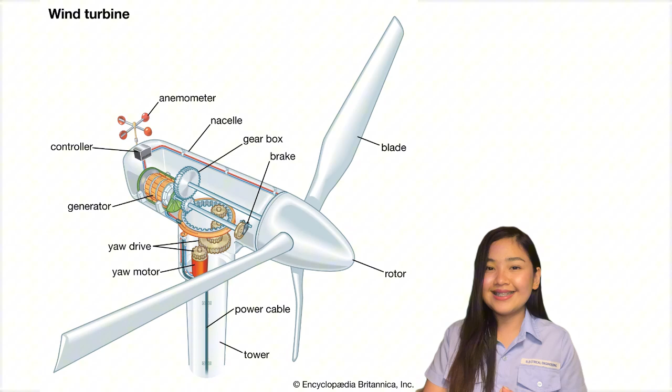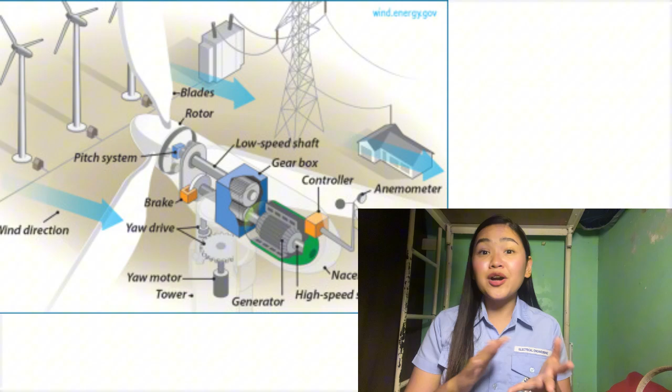To summarize this slide, provided with the full visual presentation of the wind turbine, nakikita natin kung paano nagtutulungan ang lahat ng parts na napag-usapan natin, from the blades to the generator, para makagawa ng kuryente sa sustainable na paraan. Wind turbines are the perfect example of how engineering and nature can work hand in hand to create solutions for renewable energy.

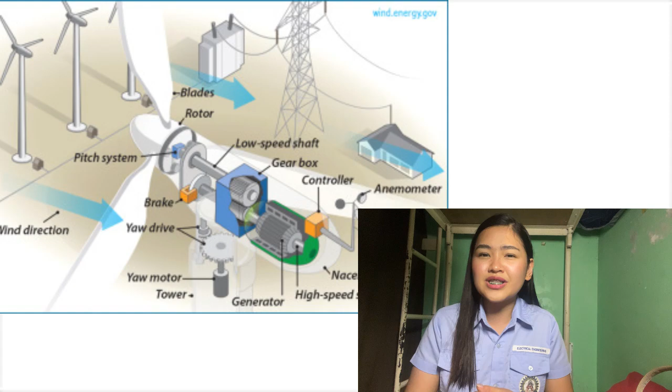Let's dive deeper into the key parts of the wind turbine and their specific functions. The first one, blades. This captures the wind energy and rotates due to the wind force.

The second one, low-speed shaft. Ito naman ang nagtatransfer ng motion mula blades papuntang gearbox. Gearbox, pinapabilis dito ang rotation speed upang magamit ang generator. At pang-apat, generator. Ito ang nagko-convert ng mechanical energy to electrical energy.

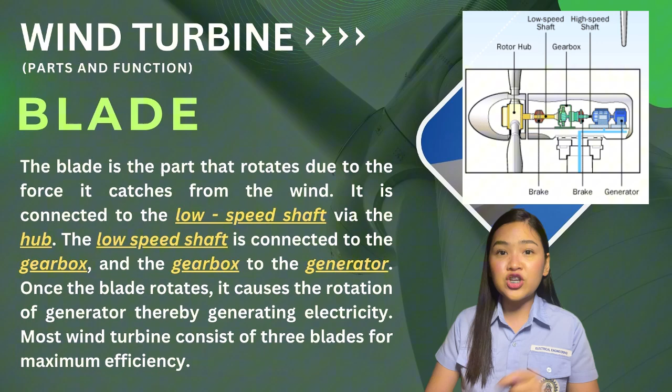Most modern turbines have 3 blades. Bakit nga ba 3? This design provides balance between efficiency and mechanical stability. Example, think of it like a bicycle. The gears and chain help transfer pedaling effort efficiently, allowing the wheels to spin faster with less effort, just like a gearbox in the wind turbine.

Now, let's move on to different parts of design ng wind turbines. Modern turbines are designed with long and wide blades, typically ranging from 40 to 60 meters in length. Ang haba at laki ng blades ay napakahalaga para mas masalo niya ang mas maraming air or hangin.

As technology has advanced, wind turbines have become quieter, more efficient, and more compact. Sa ngayon, mas adaptable na ito sa iba't ibang environment, mula rural areas hanggang sa coastal regions. Example nito, kung nakita nyo yung wind turbines sa Ilocos Norte, sobrang laki at taas nila, di ba? Pero kahit ganoon kalaki, napaka-silent operator nila. Hindi mo halos maririnig ang tunog kahit nasa malapit ka.

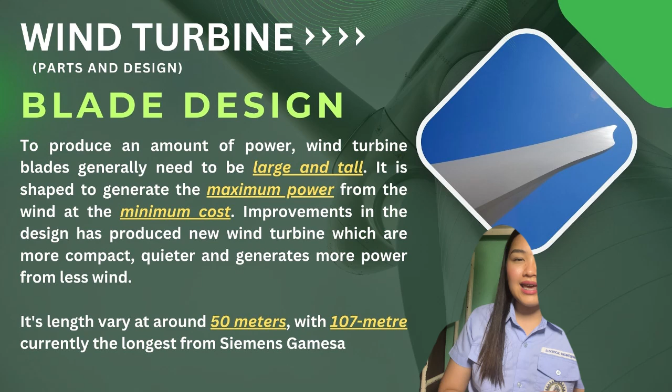Ngayon, pag-usapan naman natin ang mismong design ng blade. The shape of the blade's cross-section is crucial for its aerodynamic performance. Kapag tinamaan ng hangin ang blade, it creates a lifting force, causing the blade to rotate. Sa dulo ng blade or tip, umiikot ito ng mas mabilis kaysa sa bilis ng hangin mismo. Ang phenomenon na ito ang dahilan kung bakit sobrang efficient ang wind turbines sa pag-capture ng energy.

Example nito, parang yung kamay mo, kapag inilabas mo ito sa bintana ng kotse, kapag itinilt mo ito, nararamdaman mo na parang tinutulak ng hangin pataas o pababa yung kamay mo, di ba? Ganyan ang principle na ginagamit sa blade para umikot at ma-maximize ang hangin.

The modern blade designs are also optimized to perform well in different wind speeds, whether it's a gentle breeze or strong gust. This versatility makes wind turbines a more reliable energy source.

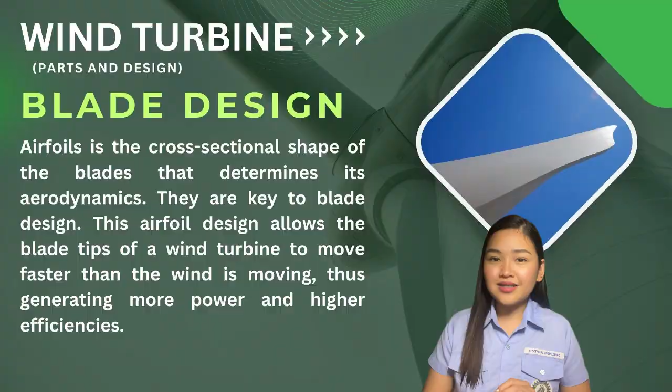For our next slide, the airfoil design. Para mas maging effective ang wind turbine, sobrang mahalaga ang design ng blades. Dito pumapasok ang konsepto ng airfoils. Ito ay isang cross-sectional shape ng blades. Ang airfoils ay shape kung saan dinedesign depende sa laki ng blade.

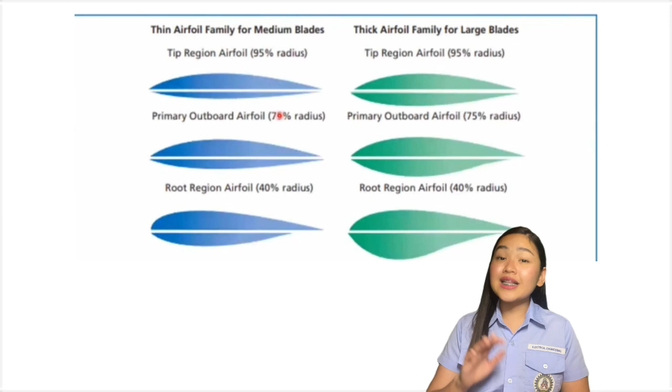Each blade has a specific role. The first is the tip region, 95% of the radius. This is the end of the blade which is designed for speed.

The second is the primary outboard airfoils, around 75%, where the captured energy is concentrated.

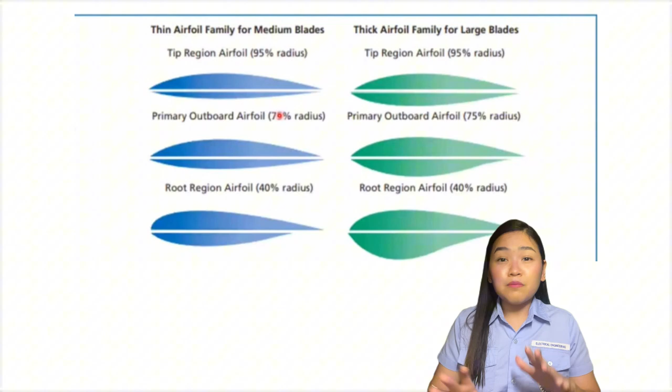Think of the blade design like an airplane wing. It's not flat but curved to maximize the lift created by the wind. This ensures that the wind turbine can convert even weak winds into usable energy efficiently.

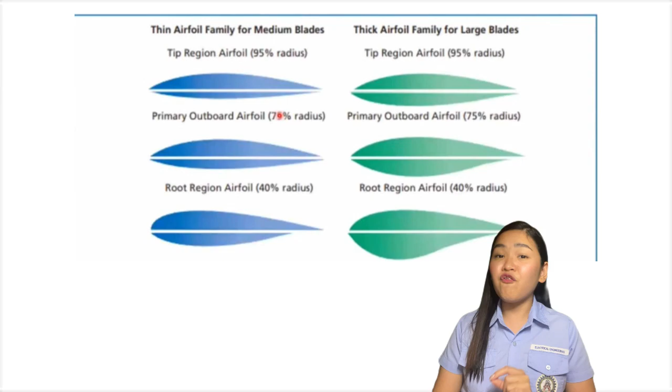Another part and design aspect of the wind turbine is blade aerodynamics. Wind turbine blades work by generating two aerodynamic forces, the lift force and the drag force, due to the wind and the airfoils.

Lift force is perpendicular to the airflow and is in line with the blade rotation, while drag force is in line with the apparent wind direction, which opposes the blade's motion. Drag increases in proportion to the frontal area of the object facing the wind.

Additional information about lift: the curved side of the blade creates low pressure while the flat side creates high pressure. The pressure difference pushes the blade away from the wind. The lift force increases as the blade is turned at a greater angle of attack.

At a very large angle of attack, the blade stalls and the lift decreases.

Additional information for the drag force: drag force is the friction of the wind against the blade surface. That friction is what creates the drag.

Next, the turbulence at the trailing edge of the blade also creates drag, and design engineers try to minimize drag to make the turbine more effective.

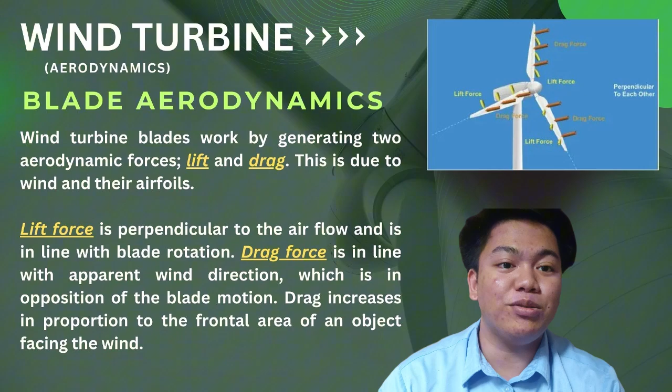In this presentation, we will see two formulas: the formula for lift force and for drag force. First, to calculate the lift force, we multiply CL, which is the coefficient of lift force.

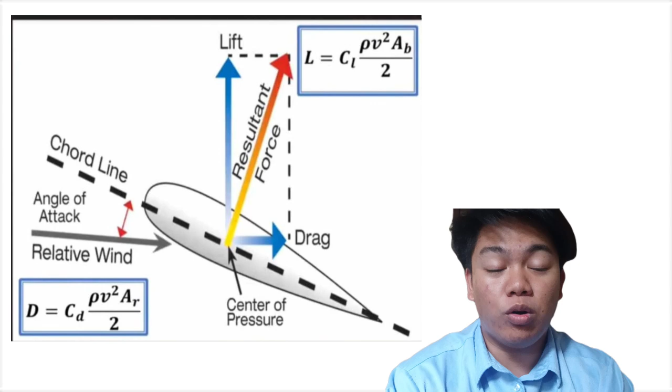Continuing with blade aerodynamics: another thing the airfoils enable is for the blade to attain a difference in pressure on both sides.

The most curved side, or convex side, generates low air pressure, while high pressure air pushes on the less curved, slightly concave side. This is actually the reason for blade rotation.

Another explanation for how the blade rotates is that air wants to move from the high pressure area to the low pressure area, causing the blade to spin.

Another key point for this is Bernoulli's principle, which explains how a pressure difference can create lift. When a fluid, like air, flows over a curved surface, it has to travel a longer distance on the curved side, causing it to speed up and thus creating a low pressure area.

Also responsible for this are the blade design and the rotation direction.

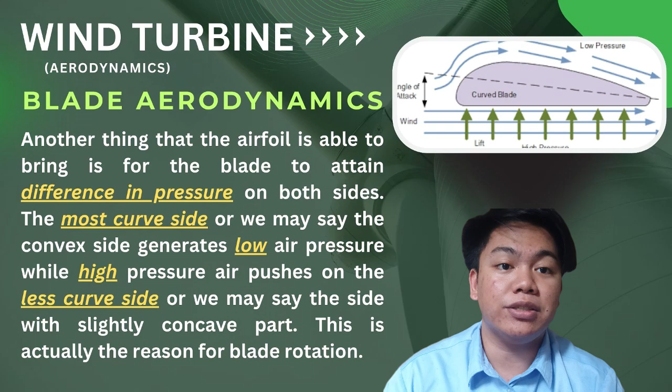The next part is the blade wind orientation. Here is the question: based on the figure illustrating the optimum angle of attack, which part of the blade is the leading edge and the trailing edge, front and back? To further elaborate, this is the explanation for you.

In a wind turbine, the angle of attack is crucial because it directly determines the amount of lift force generated by the blades, which is primary for converting wind energy into rotational power. Essentially, the optimal angle of attack maximizes the lift force while minimizing drag, allowing turbines to extract the most energy from the wind. The key points about the angle of attack is, well, first, the lift force.

The angle of attack is also important for stall condition. If the angle of attack becomes too large, the airflow over the blades separates, causing a sudden drop in lift known as stall, significantly reducing power output. Another point is blade design: wind turbine blades are designed with a specific airfoil shape to optimize angle of attack for efficient power generation across a range of wind speed.

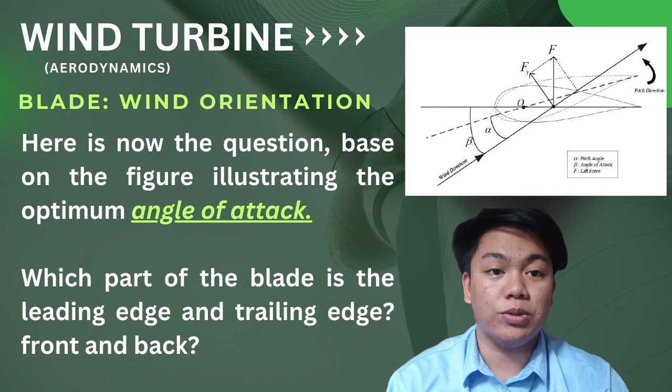Also, angle of attack is important for pitch control. Wind turbines use a pitch control system to adjust the angle of attack of the blade by changing their pitch angle, allowing them to maintain optimal performance in varying wind conditions. And the last one, dynamic changes: the angle of attack constantly changes as the blade rotates and encounters different wind speeds at various points along its span. That's why angle of attack is really important in order for a wind turbine to maximize its power conversion potential.

The next presentation for the blade rotation, we have a question here. What will be the rotation of the blade? Is it pushed to the side that has more curve, or pushed to the side that has less curve?

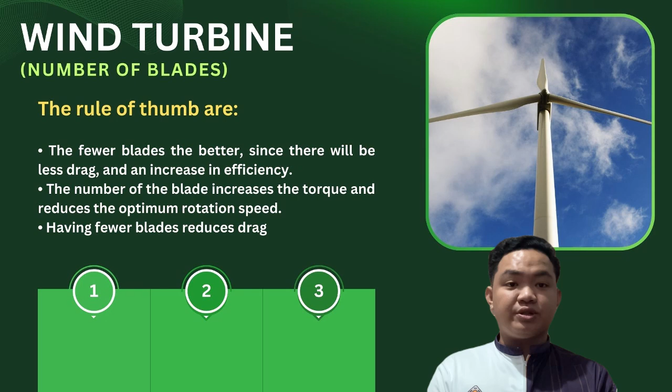Aralin natin maigi bakit 3 blades ang nagbibigay ng best performance.

Dito ay makikita natin ang 1 blade na wind turbine. Obviously, makikita natin na ang mangyayari talaga dito ay hindi magiging balance yung weight ng wind turbine na makakaapekto sa stability ng wind turbine.

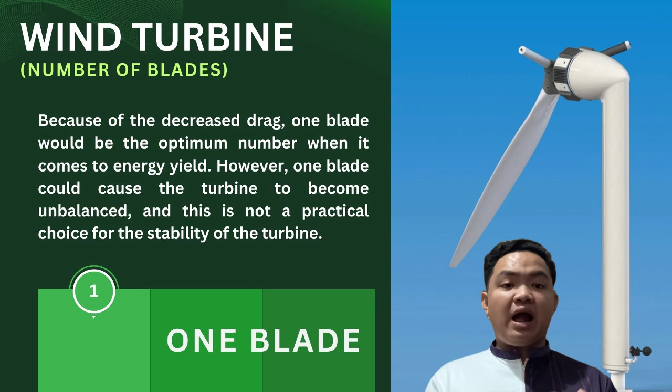O dito naman, makikita natin yung 2 blade na wind turbine. Ayan, makikita naman natin na magiging balance na yung weight, tapos masasabi din natin na mas maliit yung drag force na ma-generate nito. So bakit hindi 2 blades ang best design?

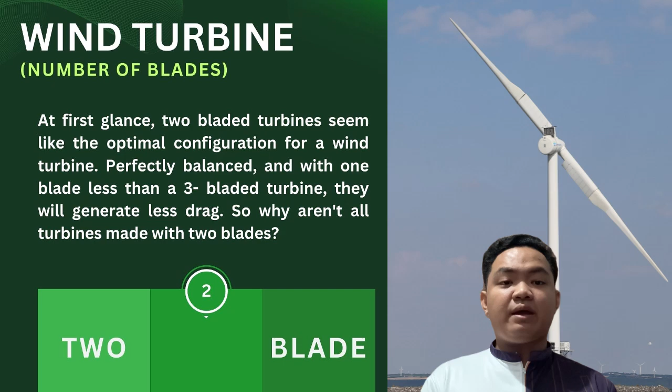Ang dahilan ay makakaapekto ito sa yawing. Ano nga ba yung yawing na tinatawag? Ito ay yung pagsunod ng nacelle sa direksyon ng hangin kasi yung nacelle ay hindi naman nakafix. Ang 2 blades design ay hindi kayang sumuporta ng yawing na mangyayari kapag nabago ang direksyon ng hangin. Kaya kung ito ay gagamitin, ay magkakaroon ito ng wobble na magre-resulta ulit sa unbalance.

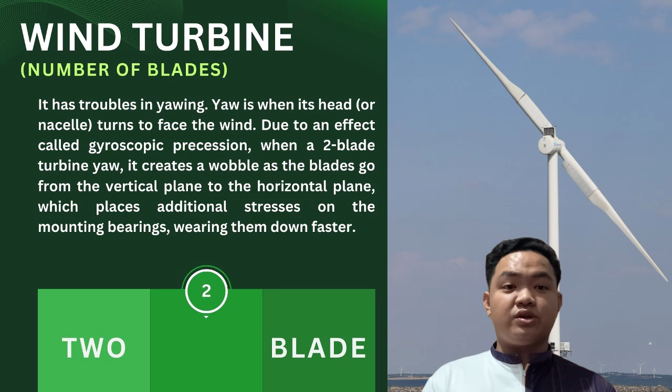Dahil madadagdagan yung stress sa bearings, kaya hindi rin maganda ang 2 blade design para sa wind turbine. Kung more than 3 blades naman, mas malaki yung magiging wind resistance niya at magre-resulta daw ito sa mas mabagal na generation ng kuryente. So paano malaki ang wind resistance?

Ganito yan. Sa physics, napag-aralan natin ang static force. The more na mas mabigat ang object is mas mahirap itong pagalawin o itulak. Ganun na lamang din sa blades ng wind turbine.

The blade tilting mechanism in a wind turbine is a system that adjusts the angle of the blades in response to the changes in wind speed. Kapag tumaas ang bilis ng hangin, nagbabago rin ang anggulo ng relatibong bilis ng hangin. And to maintain optimal efficiency, the blades need to be adjusted always to be at the optimum angle of attack. And this mechanism uses sensors to detect wind speed and then automatically tilts the blades to the most efficient angle.

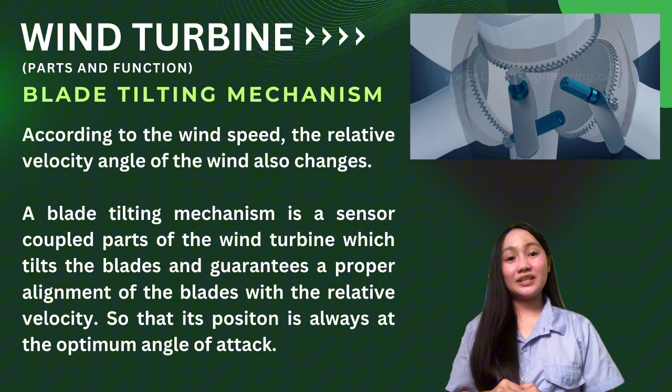Now let's talk about the nacelle. The nacelle is the housing located at the back of the wind turbine blades. Think of it as the brain of the operation. Inside this protective casing are crucial components that convert the rotational energy from the blades into usable electricity. Specifically, naglalaman ito ng gearbox na kung saan nagpapataas ng rotational speed ng low-speed shaft na nanggagaling sa mga blades at ang generator na nagko-convert ng bilis na ito sa kuryente. Other than this, iba pang maliliit na bahagi ay nasa loob din ng nacelle para matiyak ang maayos at efficient operation.

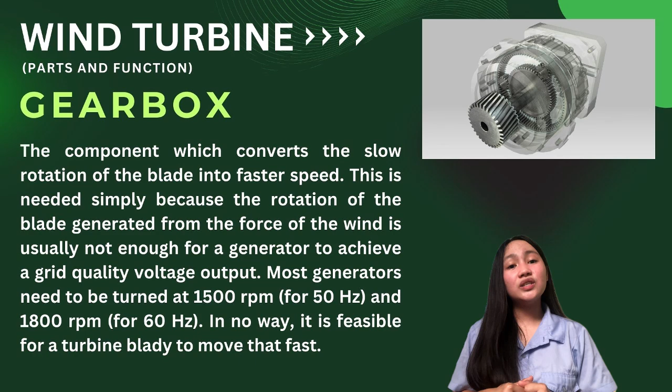Next in line is the gearbox. The gearbox in a wind turbine is a crucial component that increases the rotational speed of the turbine's blades. The slow rotation generated by the wind isn't fast enough to produce grid quality electricity. The gearbox acts as a speed increaser, stepping up the relatively slow rotation of the main shaft to a much faster speed required by the generator. Ang mas mabilis na pag-ikot na ito ay nagpapahintulot sa generator na makagawa ng kinakailangang voltage at frequency para sa electrical grid.

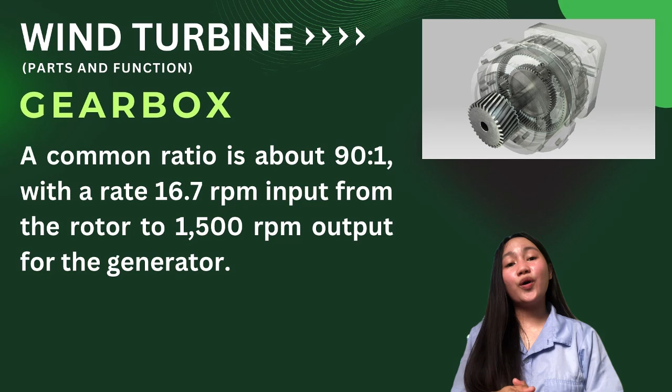The gearbox in a wind turbine uses a system of gears to increase the rotational speed. A common gear ratio is around 90:1. Ibig sabihin, for every rotation of the input shaft, or yung connected sa rotor, the output shaft na connected sa generator rotates 90 times. At ang malaking pagtaas na ito ng bilis ay kinakailangan dahil ang mabagal na pag-ikot ng mga blades na direktang pinapaandar ng hangin ay hindi sapat na mabilis para sa efficient na pagbuo ng kuryente or electricity.

Moving on to direct drive. A direct drive wind turbine is an alternative design that eliminates the gearbox found in traditional wind turbines. In a direct drive system, the main shaft is directly connected to the generator. This means the generator spins at the same speed as the turbine blades. Ang kawalan ng gearbox ay nagpapasimple sa sistema, binabawasan ng bilang ng mga gumagalaw na bahagi at nag-uugnay na pagkasira.

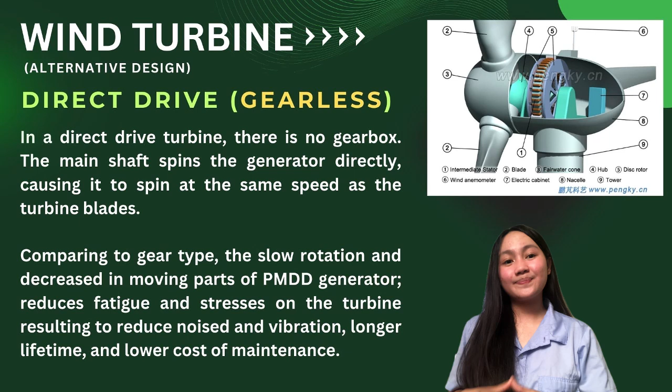As for this slide, the image shows a diagram of a direct drive Hercules wind turbine with its components labeled. And due to inconsistent wind, gear-type turbines often operate at partial loads, while the PMDD or the permanent magnet direct drive generator in a direct drive turbine maintains efficiency even under these conditions. This makes it suitable for offshore wind applications.

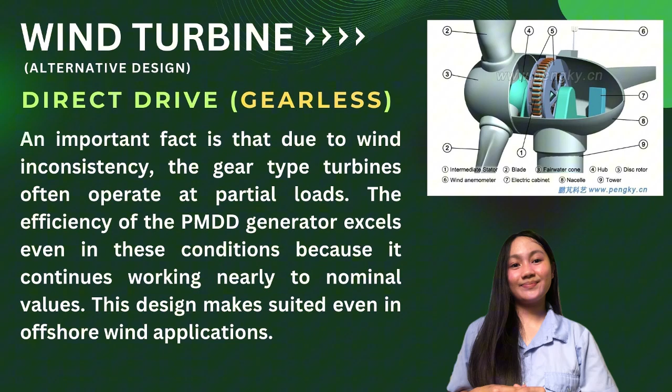The core content highlights the advantage of a direct drive wind turbine design, particularly its superior performance under fluctuating wind conditions and its suitability for offshore use. This slide shows a large generator used in a direct drive wind turbine.

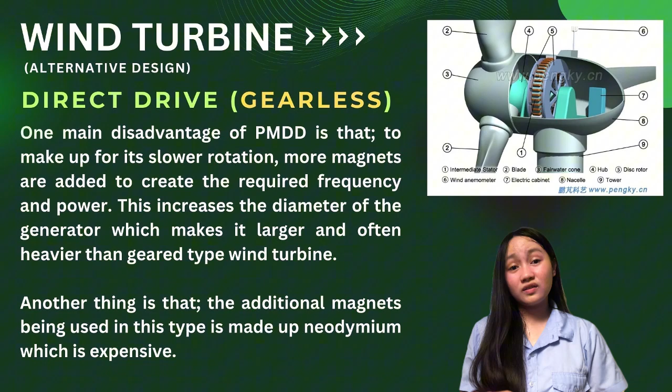It explains that one main disadvantage of this type of generator, the PMDD or permanent magnet direct drive, is its lower rotation speed. To compensate and generate the required power, more magnets are needed, resulting in a larger and heavier generator compared to those used in gear-type wind turbines. Additionally, the magnets used in PMDD generators are often made of neodymium, a costly material. Therefore, while direct drive systems offer efficiency advantages in some areas, the higher manufacturing and maintenance costs are a significant factor to consider.

Wind turbine parts and functions: the brake. The brake system in a wind turbine is a protective device coupled with sensors which automatically stops the rotation of the blades whenever it detects activities that could harm the system during operation, for example very high wind speed, vital parts not working, or maintenance on power lines.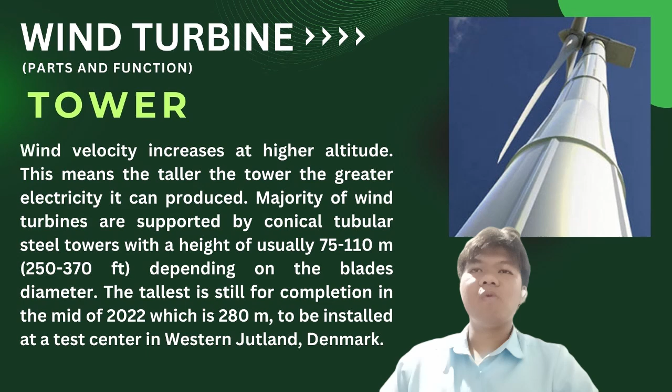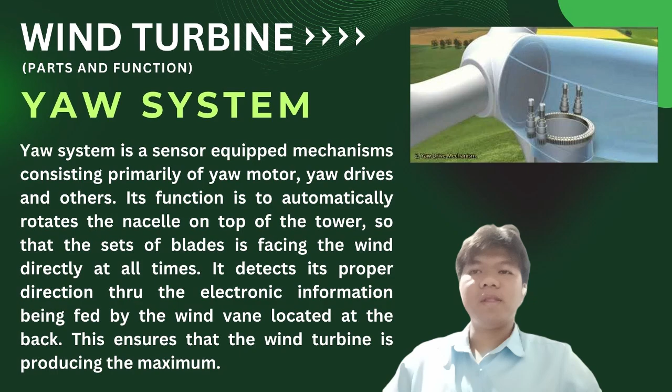Now we're going to explain the advantages and disadvantages of a wind turbine. First, advantages: wind is free, and wind farms need no fuel.

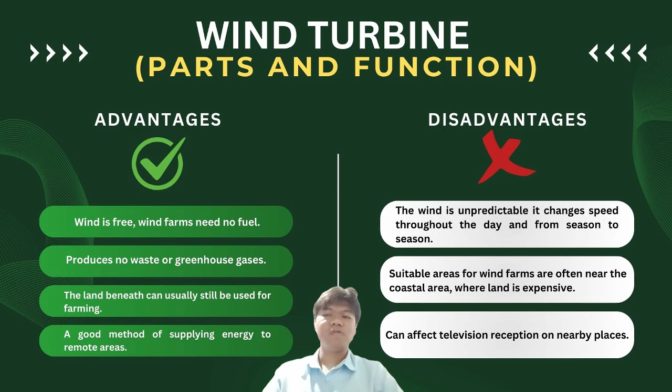Another one is the Alta Wind Energy Center na may maximum capacity of 3,000 megawatts, pero sa ngayon meron naman siyang 1,548 megawatts. Ito naman ay matatagpuan sa California, USA.

Susunod dito is yung Muppandal Wind Farm. Maximum capacity naman niya is 1,500 megawatts at matatagpuan naman to sa India.

Another one na largest wind farm is yung sa UK, which is the Hornsea Project 1 na may maximum capacity of 1,218 megawatts. So another is the Markbygden Wind Farm, which has a maximum capacity of 4,000 megawatts.

Pero sa ngayon, it's have 1,120 megawatts only. Ito naman yung matatagpuan sa bansang Sweden.

Another one is matatagpuan din sa bansang India. Ito ay tinatawag na Jaisalmer Wind Park na may maximum capacity of 1,064 megawatts.

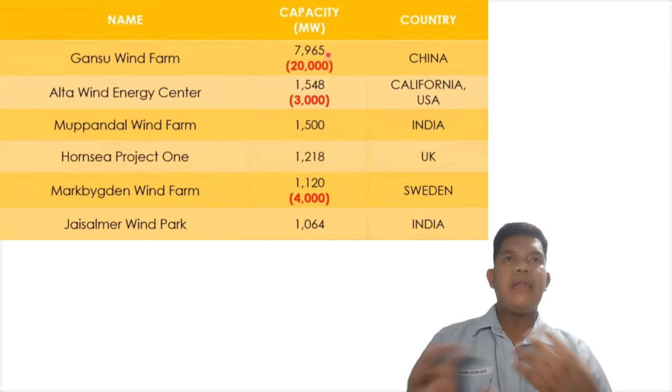Para mas malinawan pa tayo lalo sa Gansu Wind Farm, ito yung mga bagay na dapat nating tandaan para sa kanila. Ito ay isa sa pinakamalaking proyekto ng renewable energy sa buong mundo. Ito nga ay yung Gansu Wind Farm.

Kilala rin ito sa tawag na Jiuquan Wind Power Base. Matatagpuan nga ito sa kanlurang bahagi ng Gansu Province sa China. Isa ito sa makasaysayang hakbang sa bansa tungo sa pagiging leader sa mas malinis at sustainable na energy source.

Bukod dito, nagsimula yung construction ng proyektong ito noong 2008 sa pamamagitan ng pagpapagawa ng 750 kilovolts AC power line upang maghatid ng kuryente mula sa wind farm. Ang aktual na pagtatayo ng mga wind farm ay nagsimula naman noong August 2009. Ito ay isang hakbang na nagbibigay ng bagong daan at bagong yugto ng kasaysayan sa larangan ng renewable energy.

Ang Gansu Wind Farm ay hindi lamang isang power plant, ito rin ay simbolo ng isang pangako ng China para sa isang green energy. Sa kabuuang kapasidad na ito na mayroong 5,160 megawatts, ito ay isa sa pinakamalaking wind farm sa buong mundo. Isa itong mahalagang bahagi ng pagsusumikap upang mas mabawasan yung carbon emission at maitaguyod yung sustainable development.

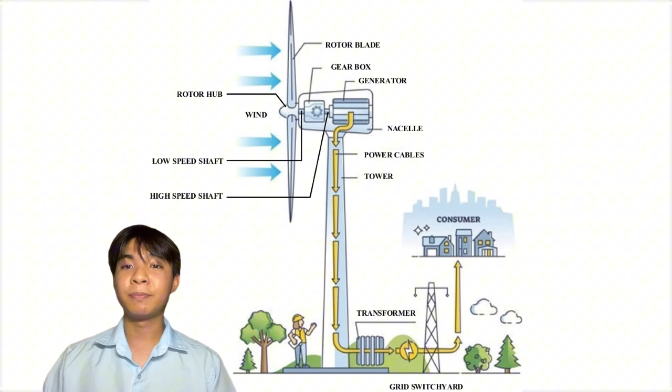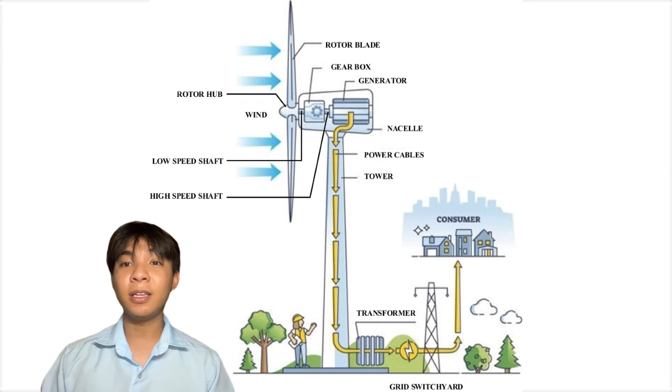So in summary, ang wind energy na nanggagaling sa hangin ay kino-convert into electricity. Pinoproseso at tinatransmit papunta sa power grid, at sa huli, ito ang nagbibigay ng kuryente sa ating pang-araw-araw na gamit.

Saan nga ba mas maganda ang lokasyon na itayo ang isang wind turbine o magkaroon ng isang wind farm? Isa sa mga pinakamahalagang bahagi ng isang wind farm ay ang tamang lokasyon niya. Para magtagumpay at maging epektibo ang isang wind farm, kailangan ng mga wind turbines ang mga lugar kung saan malakas at maaasahan ang hangin. Ang pinakamainam na lugar ay matatagpuan sa mga baybayin, sa tuktok ng mga bilugan at matataas na burol, mga malalawak na kapatagan, at mga agos sa kabundukan — mga lugar kung saan natural na malakas ang hangin at matatag ang daloy nito.

Minsan, ang mga wind farm ay matatagpuan din sa dagat, sa offshore. Sa mga ganitong lugar, walang sagabal tulad ng mga gusali o puno na makakaapekto sa paggalaw ng hangin. Upang maging epektibo, kailangan ng average na bilis ng hangin na hindi bababa sa 25 km per hour. Dahil sa ganitong bilis, mas magiging produktibo ang wind farm sa paggawa ng enerhiya. Sa tamang lokasyon at sa tamang kondisyon ng hangin, ang mga wind turbines ay kayang mag-produce ng mas malinis at sustainable na enerhiya na mas mapapakinabangan ng mga tao o ng komunidad sa bansang iyon.